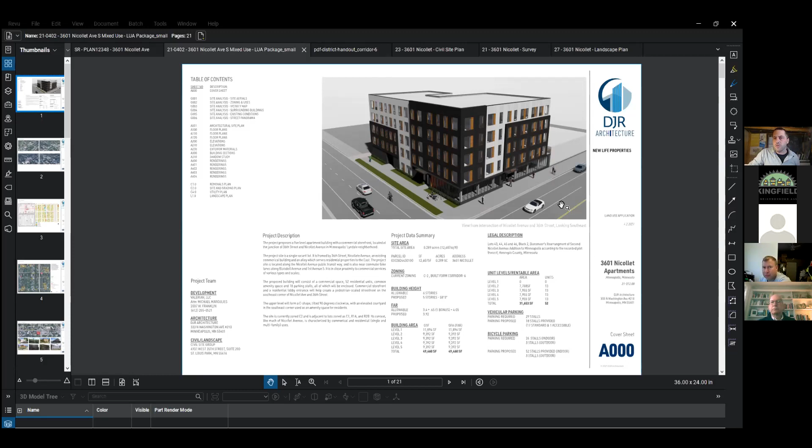Okay, it looks like we're getting some final folks in from the waiting room. I'm going to flip off sharing for one second, just for our recording. There we go. Michael, if you want to take it back over in one minute, that'd be fine. Sounds good.

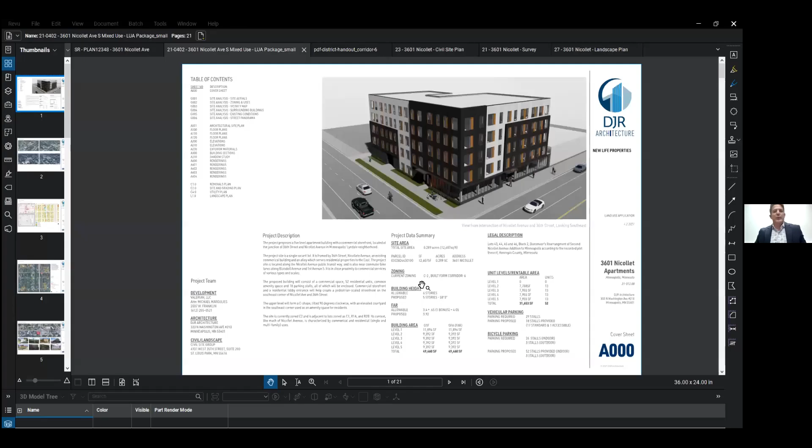Thanks everyone for tuning in tonight and letting us present this project to you. This is 3601 Nicollet Avenue, a 5-story, 52-unit building at the corner of Nicollet Avenue and 36th Street. I'm going to present exactly what we sent to the city of Minneapolis for the land use application. We'll walk through this one by one, and I'll give you a good overview of what the project looks like.

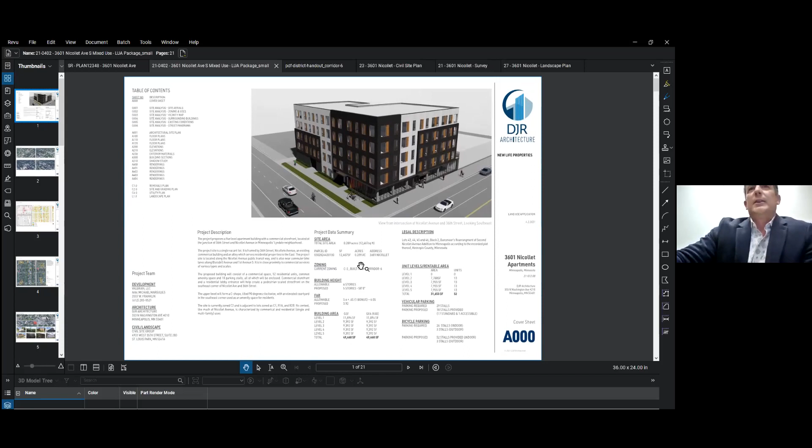The overall zoning of this project is C2 with an overlay, a built form overlay from the city of Minneapolis, where because of the zoning and the built form overlay, they want mass with the new 2040 plan. If we were going to use all of the 3 different bonuses on the built form overlay, we could actually go up to 6 stories and cover almost the entire site. We chose 5 stories and a lesser footprint because it made better units, and we were worried about the overall scale of the building. So that's how we arrived where we did.

At the corner of Nicollet and 36, we have some retail on the Nicollet side, and we have a residential access point along 36th coming from the north.

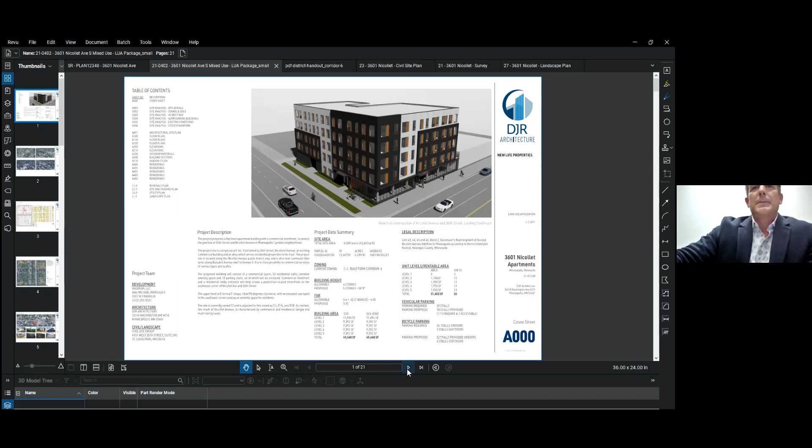Here's just some aerials of the site. I'm sure you're all well aware of where this is.

And of course, the zoning - C2. I don't believe we're in the zoning overlay district, but the built form overlay that the Minneapolis Planning Commission has just come out with, within this past year, is also contributing to the regulations here.

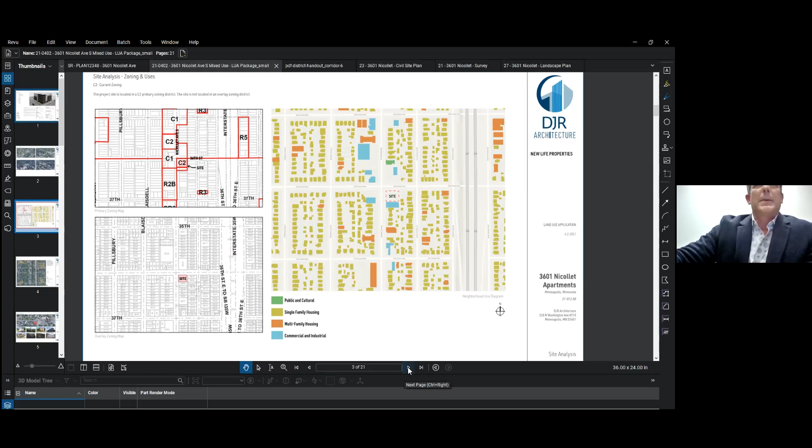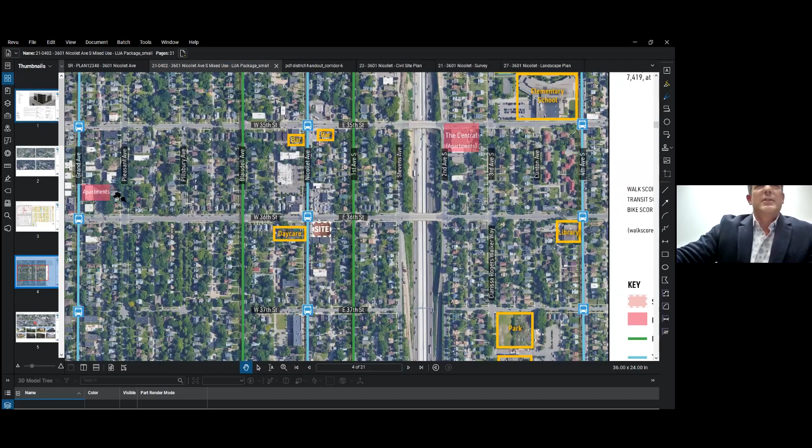Here's a diagram showing the site here, this little area, and then the different elements around it. We've got a daycare across the street, and some restaurants and bars and different apartment buildings, schools, parks - just a wide overview of the overall site.

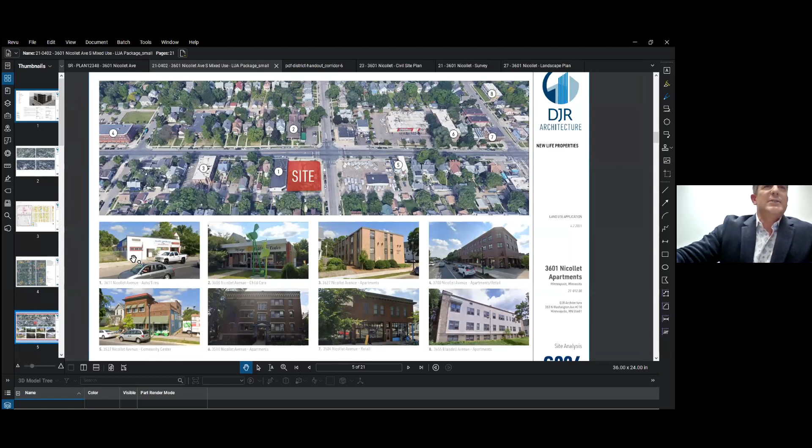Then a little bit closer view of the surrounding buildings of the site. Across the street, we've got the child care center. Directly adjacent, we have the auto service center that this will share the property line with on the south side. Various apartments, and a newer apartment building a little bit to the south on Nicollet.

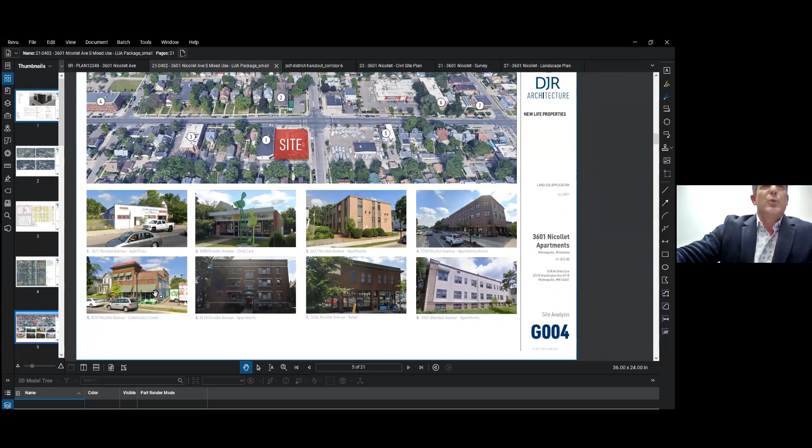We've got a community center just to the north of the U-Haul center, and then different apartments and so on.

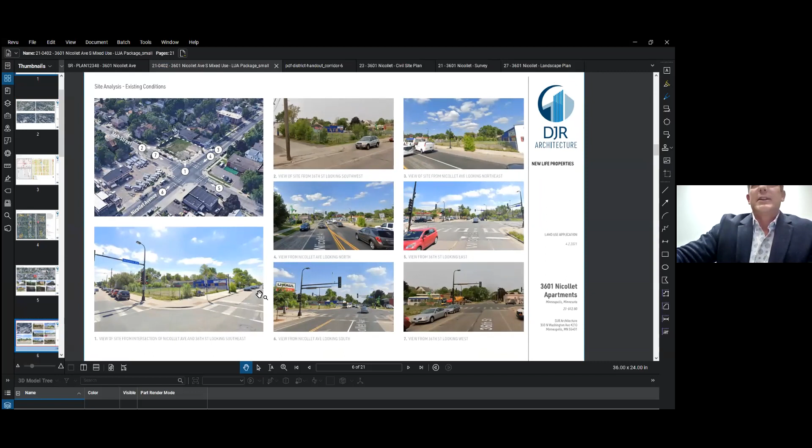These are just views from different parts of the site looking back towards the site. Again, I'm sure you guys are well aware of this - it's a very prominent corner on 36th and Nicollet, and these are different views to orient you, as well as some street panoramas. I'll go through this relatively quickly.

So the site plan - we were allowed, with the way it's zoned, a 0 lot setback on all 4 sides with the C2 zoning. Had there been a residential property to the south, it would have been a 5-foot setback, but because it's commercial use, we're allowed to go right to the property line. So what we're doing is going about a foot from the property line for constructability reasons, but we are taking up the majority of the site footprint at level 1.

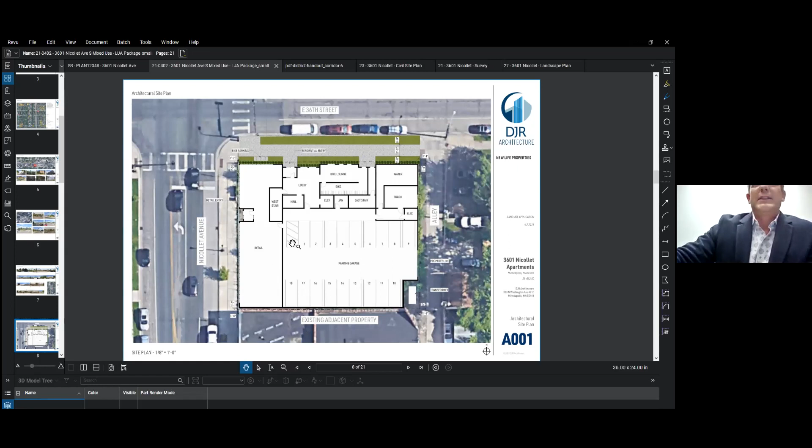As I said before, we've got retail on the Nicollet side. This retail is about 25, 30 feet deep. The idea with this retail is that we know retail is changing along Nicollet, and we may need to subdivide this down. So we're showing a vestibule in this location right now, because we really didn't want to interrupt the corner view, thinking this would be a nice spot for a tenant. But we're not limited to only this access point - we can put multiple access points around here if what people want or what possible tenants want are smaller spaces to lease.

So right along Nicollet, we're basically at a 0 setback line. Along the north side, we're also at a 0 lot setback, with about a foot off the lot line for constructability reasons. We're recessing the vestibules on both the retail and lobby space to get the door swing clearance, since we can't swing doors over the property line in Minneapolis.

There's also a niche or recess for the bike lounge and bike storage area. We've got utility areas for water and trash. Trash will be enclosed, kept in this area until it's picked up several times a week off the alley, but this will be a totally contained operation as far as trash goes.

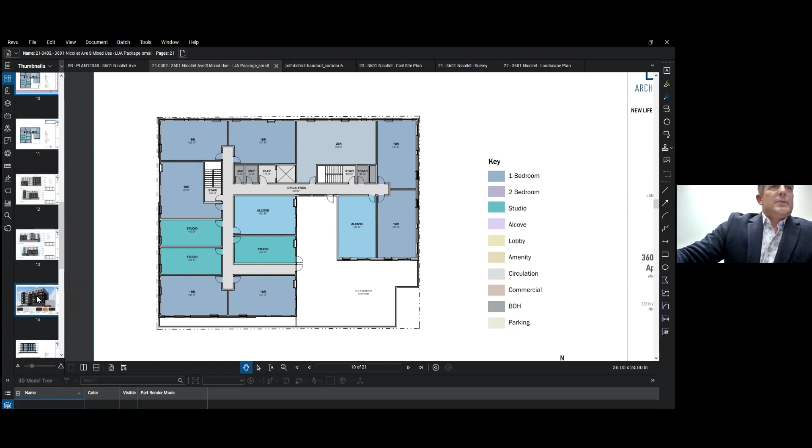So moving out to the exterior of the building, we've got this corner site and we wanted to position the building with equal weight on Nicollet and 36th. So we positioned the building so it's really hugging that corner.

It's a simple palette of materials that we're using, but I think there's a sophistication in the design, and we're breaking it down into a smaller scale that fits this small site. It's not a real big site, it's not a real big building, and I think there's enough complexity here to make it interesting.

But I think when you've got a small building like this, you run the risk of making it too complex and too busy just because it's not that big of a building. I think we only have about 120 feet across the front of this building, which is a relatively small building in Minneapolis.

As far as the material palette, on level 1 we're going to have a lot of storefront and glass at the retail space. And then there's going to be this Manganese Ironspot brick with a dark colored grout to match the brick, which will really make it seem monolithic and clean.

We're going to have a dark aluminum canopy that runs at the vestibules, and then a little eyebrow that runs the rest of the way. We've also got exposed fastener standing seam metal panel, that's the black. This is something I didn't mention last time we talked.

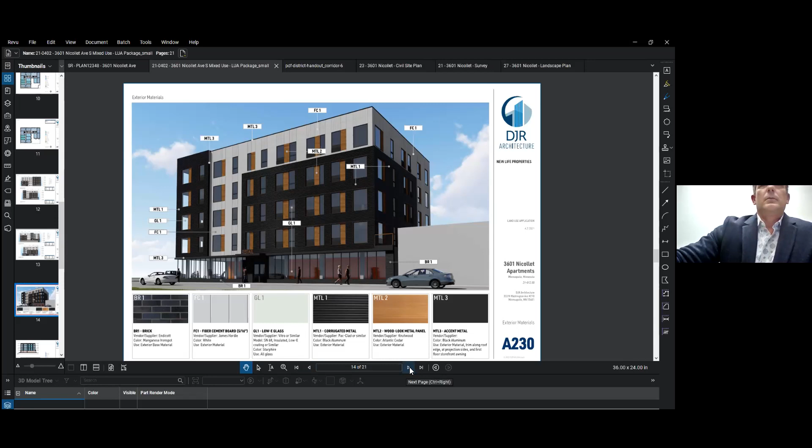So we've got some sections of the building. The first story is parking, retail, lobby space, and function. We do not have a subterranean level for a couple of reasons. One, typically you'd put parking down there, but it's practically not big enough to get a car down at the ramping requirements necessary. The other thing is, because there was a gas station there, we're almost certain there's probably some contamination in the soil, so it's best left where it is.

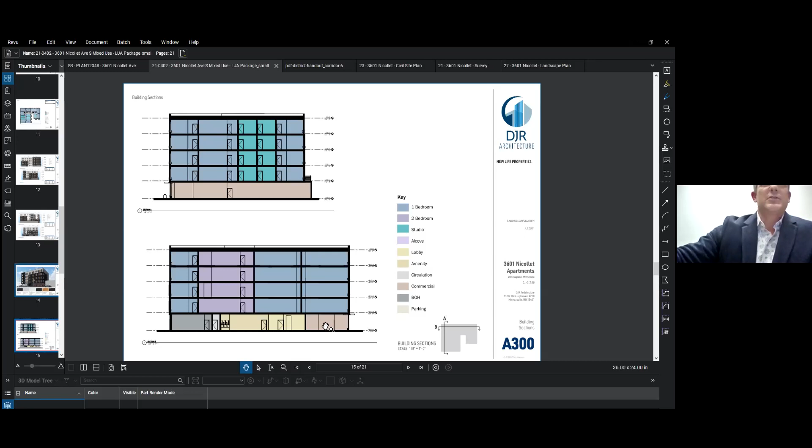We've got some shadow studies showing the impact of shadows of the building. The greatest shadow effect is going to be to the north where the U-Haul Center is, and there's the extra wide street with the extra wide right of way at 36. So some shadows will affect a few of the neighbors, but I think it's relatively minor.

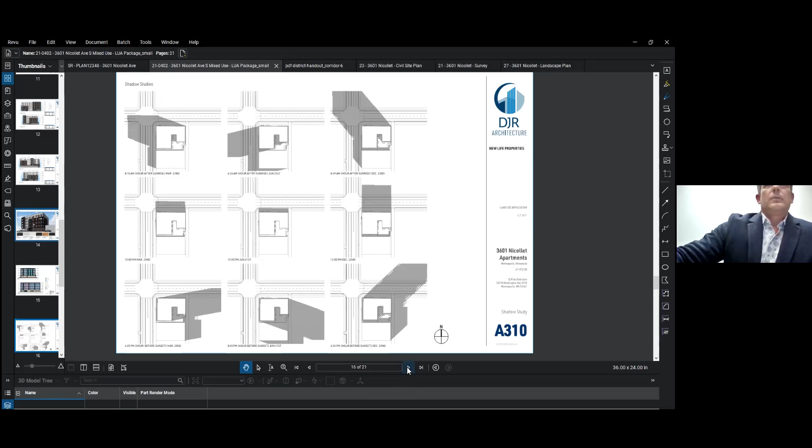And then some more views around the building. This is a view from the north looking at the 36th Street facade, again showing the entrance to the residential. And this is more of the Nicollet facade with the entrance to the retail.

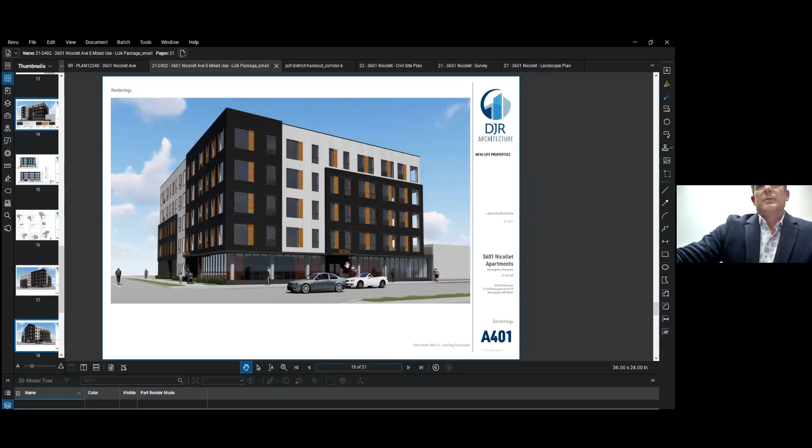So one thing we need to talk about is the variance we're going for the parking. The building overall is kind of as-of-right. We're using one bonus with the built form overlay to get us to the FAR, the floor area ratio. If we wanted to, we could have gone up to 3 bonuses and made this building much more dense, but with units and the natural daylight coming in from the southeast, we elected to go with the 1 bonus.

But the parking, just because of the floor plate size and other considerations, we were limited to 18 stalls. Right now, this building would be required to have half of the units for parking stalls within the building, which would have been 26 plus 3 for commercial, so we're really required to have 29. Our variance is to go for 18 parking stalls. We should mention the city of Minneapolis is in the process of limiting their parking requirement overall throughout all projects, and the Planning Commission has already approved something—I don't know exactly what the requirement is, but I think it might be even zero parking for a building like this.

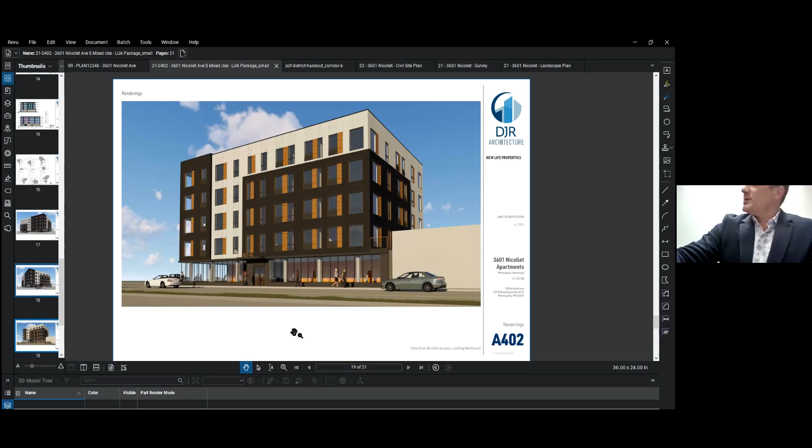So I think that kind of concludes my presentation part. I don't know, Dean, do you want to add anything, or should we start fielding questions?

No, I think you did an excellent job, far better than myself. So Michael, thank you for walking through the building. And just to clarify one comment, when someone said you look like you filled the site, we may have filled the site in its area, but we could have gone a story taller and still stayed within the zoning requirements. So we opted to scale it back and go to a 5-story versus 6-story building. I just want to clarify that comment. Outside of that, we're good and we stand for questions. Thank you.

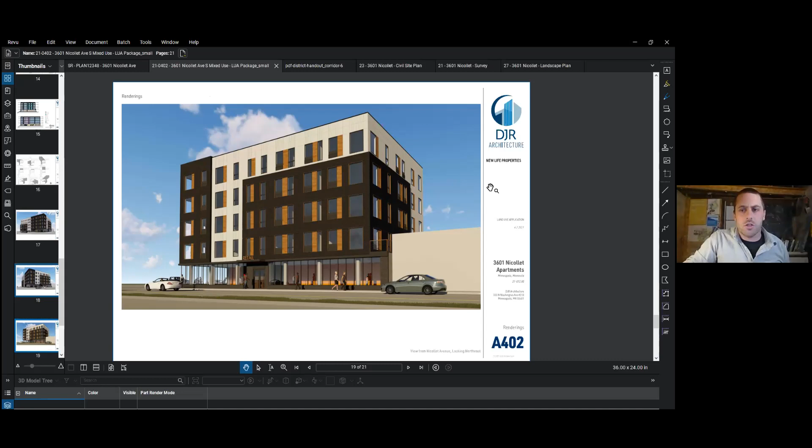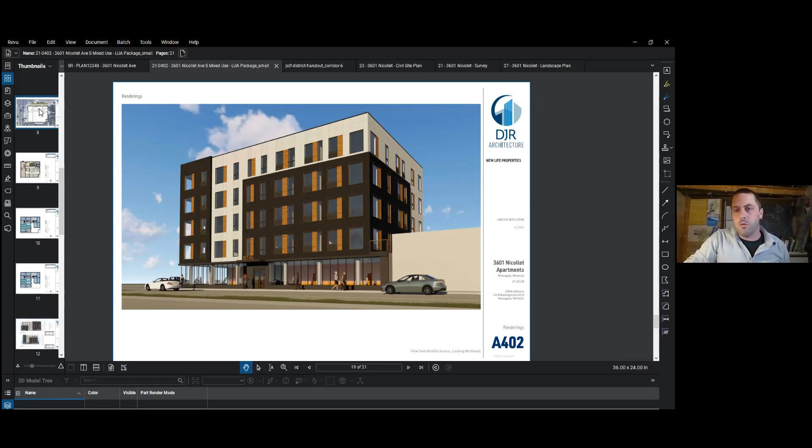So I guess the first question I had, just going off of Dean's comment about filling the site, there was a question about filling the site and how you're planning on managing snow removal, and also thinking about incorporating green space, plantings—especially green space and plantings for tenants that are in the building itself. So it's a 2-part question, mostly about snow removal and then also green space.

Michael, you want me to take or you want to go? Yeah, I think I can describe the north side of the site.

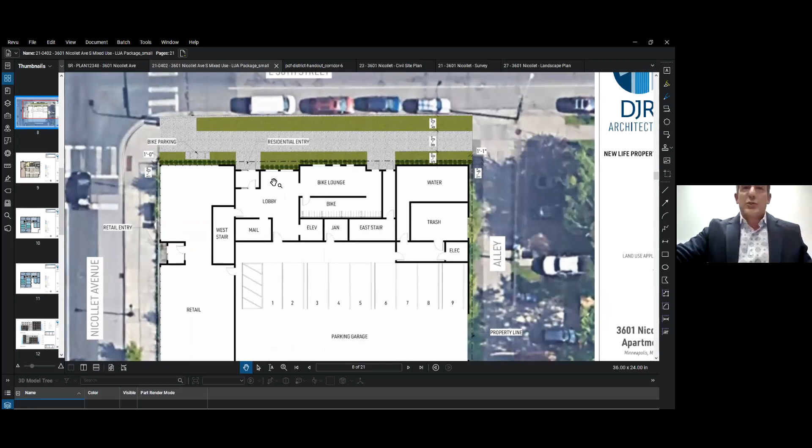There's a 5-foot right of way outside the property line to the north until we hit the sidewalk. That area is meant to be planted and will be adequate for a bit more vegetation, as well as a place where snow could be put in the winter from that part of the sidewalk.

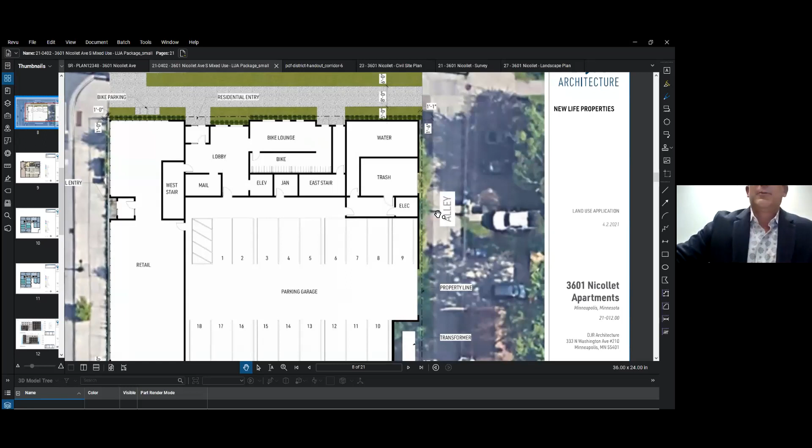As far as snow removal from the alley, just because we're close to the property line doesn't mean there's no margin left over from the alley to where the building actually begins, so snow will be piled there. It is a tight site and we're getting close to the property line.

There's enough room there to navigate the snow. The idea is that all the snow basically stays on the building's property on that basis, so we have room for some.

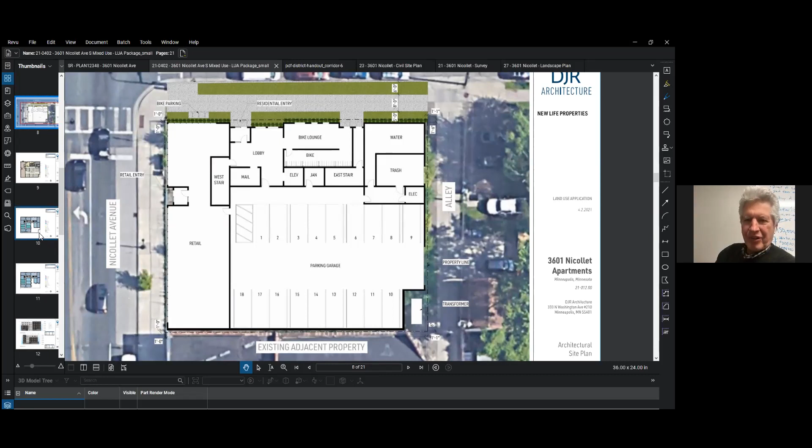There was a second question about planting. We have the green strip along the side, and also the community deck, which we may make into individual raised beds to give residents an opportunity to plant. So there are two options: one, the public right of way on the main floor, and two, the community deck on the 2nd floor of the building, that we're thinking of incorporating for the planting opportunity for residents.

Great. Could you talk a little bit about that upper deck, what your thoughts are for what's going to be up there, who's going to have access to it, and whether that's going to be a built-out feature of the project from the beginning?

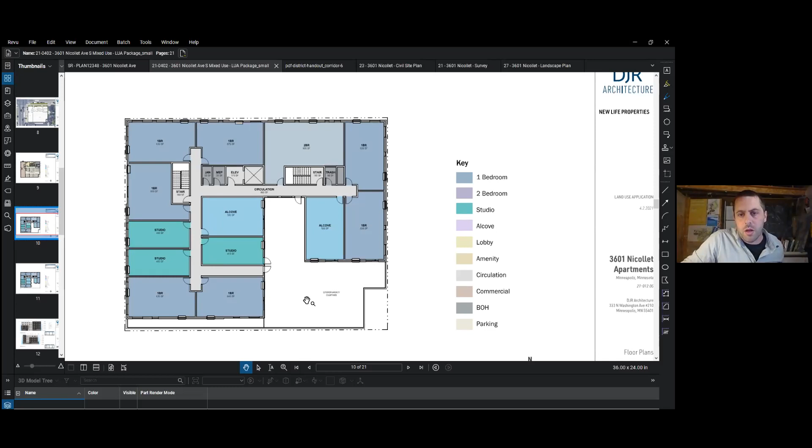The answer is yes, it will be a built out feature from the beginning. It won't be designed to be an active use because there are units right on it, so it won't have pickleball or anything like that. It's meant to be for gardening, as I mentioned, and outdoor hanging out.

There'll be a trellis, there'll be elements, there may be a smoke pit built into it. So it'll be a green space, think more of an outdoor living room design, more of a passive use as opposed to an active use will be the basis of this.

We intentionally left one unit out, as you'd see, to notch it in so there'd be light going to the hallway, so the hallways were bright and kept perceived shorter. And on all those floors, the windows from the common hallway overlook the common community space, which adds a little more interest to it.

So that's its basic function, but it will be developed out 100% when the building's open. It's not going to just be a dead roof as part of it.

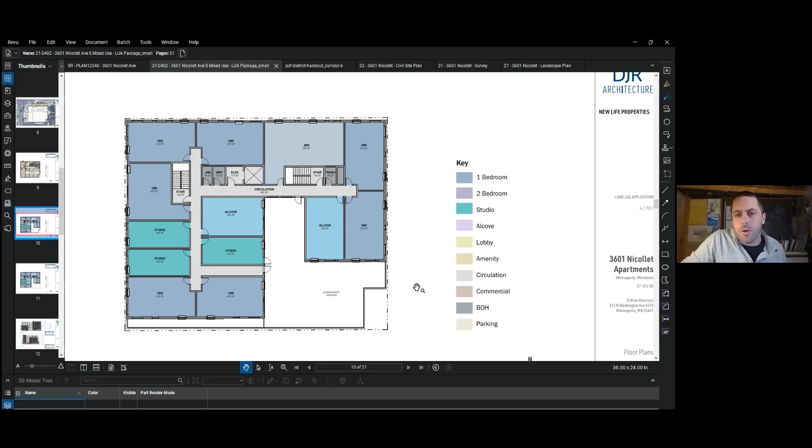Okay, great, thanks. Could you talk a little bit about affordability? There was a specific question noting that 8% of the units were going to be affordable. Can you talk about what that equates to in actual units in the building, and what that equates to in AMI and rents?

Sure, let me take that. At the moment, the city of Minneapolis is requiring an inclusionary housing policy of 8% of the units. With 32 units, that equals 2.6, which we will round up to three units.

It is a possibility, and I don't want to make too much of a commitment on behalf of the owner, but the owner has adopted programs to devote certain portions of his unit numbers to affordable units at 60% AMI, in return for the real estate tax benefits that go along with that. So that's a possibility here.

We think that this property will serve the needs of workforce housing. Although the rates haven't been fully established yet, they're probably going to be pretty near the naturally occurring affordable housing prices. So that's sort of how the housing array works.

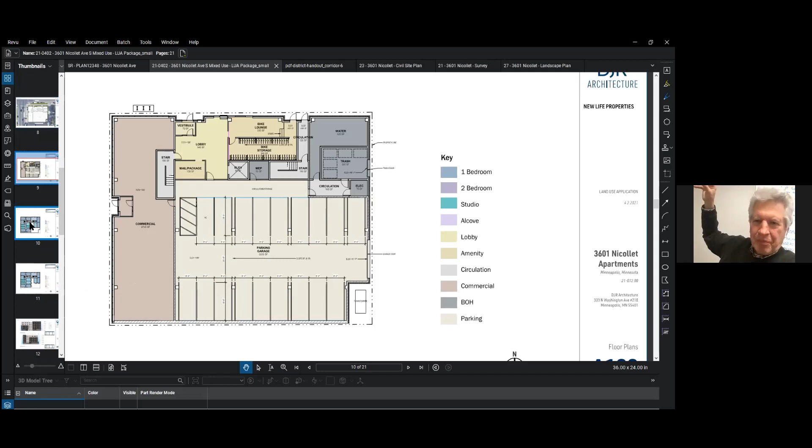Okay, so micro retail can work. We probably have entry for 2 spaces when we're set up on that, so the building can accommodate it. If we get a restaurant, we'd have to coordinate the shaft, and we're still early enough to see who shows up and sets that basis. When you've got a shaft, Minneapolis code requires an exhaust shaft to the roof for anything that has heavy cooking. If it's more of a bakery style, like a coffee shop, that's not required. We're still at the point where we have flexibility on that, and we just have to see which tenants come forward. So yes to micro tenants, no problem with a coffee shop. If we get a true restaurant, we'd have to accommodate the shaft, and we'll see when we get there if that type of tenant comes forward to see how we can incorporate that.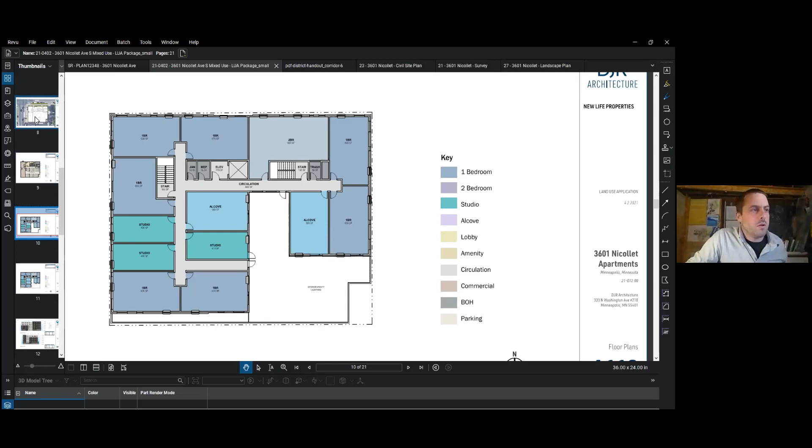Another question was the setback to the south, to the auto repair place—how close are the buildings together? You could go zero, literally, but we left a little bit of a gap to accommodate for the auto repair's footings, because these older buildings' footings tended to be across property lines and so forth. So we left a slight gap, about a foot, to accommodate that building, so we didn't put it into jeopardy in terms of construction. We're not doing a basement because, as Michael described, we are not allowed to, but we gave a little smidgen of breathing room just to protect that building structurally.

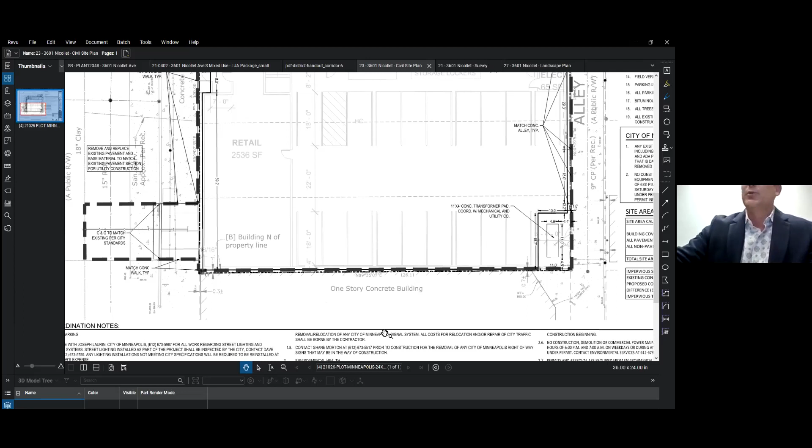And that gap, it's going to be in the range of a foot to 16 inches. It'll be enclosed—we'll put sheet metal flashing or something so nobody can get back there and get in trouble, like a kid or something. So it'll be closed off, so it'll seem like it's totally one building to the next without any opportunity to go in between the two. Correct, Michael's right about that—he and I would get stuck in there. It won't be left as a void to the street, nor to the alley side.

There's a couple questions about all of your experience here, maybe specifically in Minneapolis, designing and managing properties. So a question about how many 5 to 7 story buildings DJR has designed in Minneapolis, and also what current properties are owned by New Life Properties and managed by them.

Dean, why don't you take the first part of that? Oh Dean, sorry, you got muted on accident, I think.

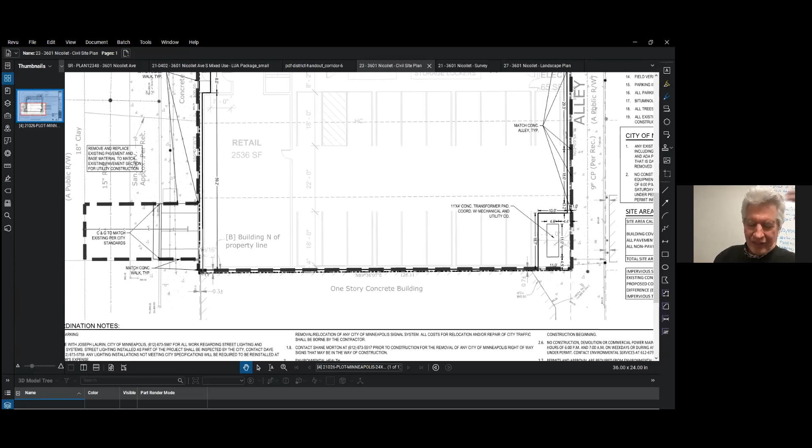Okay, thank you. So I'll answer the first half of the question. At this time, probably 40 in Minneapolis, if not more, in all parts of the city, for a variety of different projects - Northeast, all through South Minneapolis, north side of the city, and a whole series around the university area. So I'm going to say 40 off the top of my head that are built and occupied. So yeah, we've had a pretty deep, extensive background in these type of buildings, everything from very affordable to very luxury, the full range of project types.

Michael, you'll do the other half. I think, let me introduce Dan. Dan Carlson to describe a little bit about the other properties he owns and operates. Sure, we own 23 other buildings with a total of 164 units in South Minneapolis, and then we also have 40 units in St. Cloud. We own and self-manage all of those ourselves.

And kind of going off that question, would you plan on managing this building? And then there was also a question about whether there will be someone on site, like a manager on site. Yes, we will manage the building ourselves. We're trying to incorporate something to have somebody on site with the retail, like we were thinking about doing some kind of retail ourselves and having some kind of office there.

There's been a few questions, and I know you've talked a little bit about the parking and the parking variance. Questions about parking, specifically about impacts that a decreased number of parking spots in the building would have on the rest of the neighborhood. Can you talk about and reiterate your approach around parking, and also the guidance or direction that you're following from the city of Minneapolis in regards to parking?

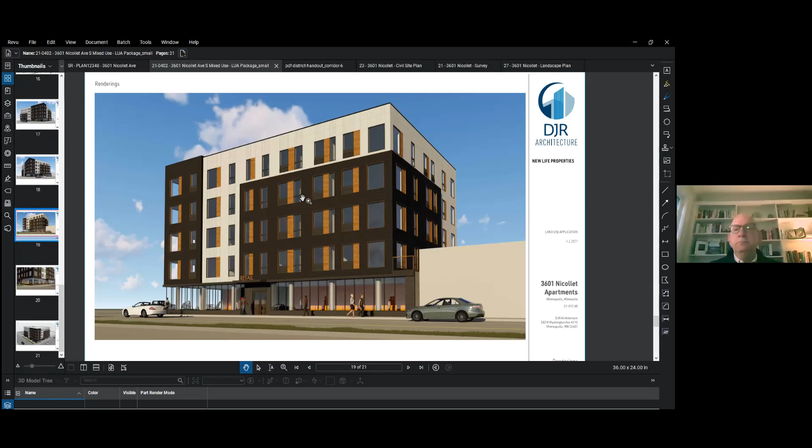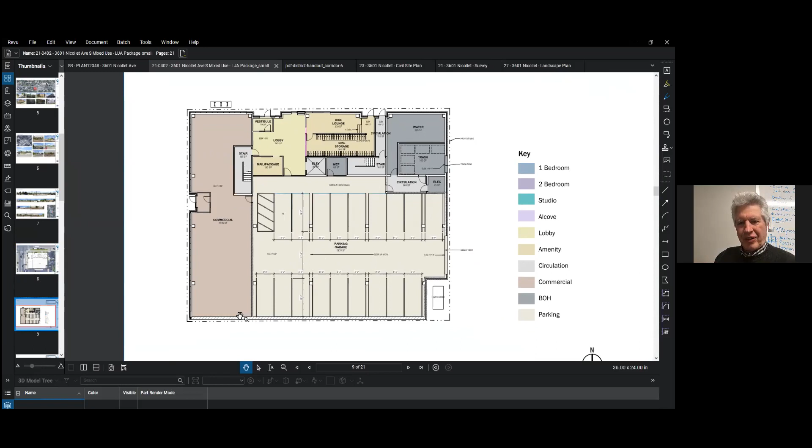The direction of the city of Minneapolis is less is more. Just to be straight up, there were two things Minneapolis planners really impressed upon us. One, enclose it - no open lots. Two, minimize it. That's really what our guidance has been from that aspect. We set this up to try to maximize the amount of parking you could get on the site, because obviously for a building we want some available parking for our tenants. That's how we chose to fill the footprint, to maximize the parking. We also shallowed up the retail to maximize the parking. Normal retail can go up to 60 feet deep, but then we would have wiped out our parking. So we made sure we had active uses wrapped around the perimeter of the building - the lobby, the bike shop, the retail - and then put as much parking as could work inside that core of the building to maximize that portion of it.

Yeah, and I would envision that there's going to be a large number of the residents here that don't have a car, and that's why we're making it so bike centric. People are going to have their bike, it's right on a transit line, and I think there's going to be a good number of people here that don't own a car that live here.

Kind of going off that a little bit, there were two questions. One, has there been any consideration to what happens if tenant parking isn't used at capacity? Could it be paid parking for retail? And then, going on your point about transit, how are you thinking about incorporating access to transit into the building, specifically like a shelter in front of the space on Nicollet - would that be a part of your project? So in terms of the parking, if parking is underutilized, obviously we'd utilize it to support the retail. That's just a definite yes.

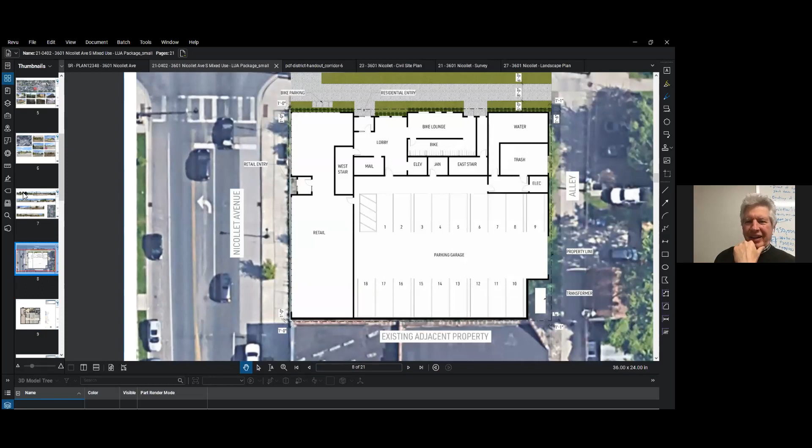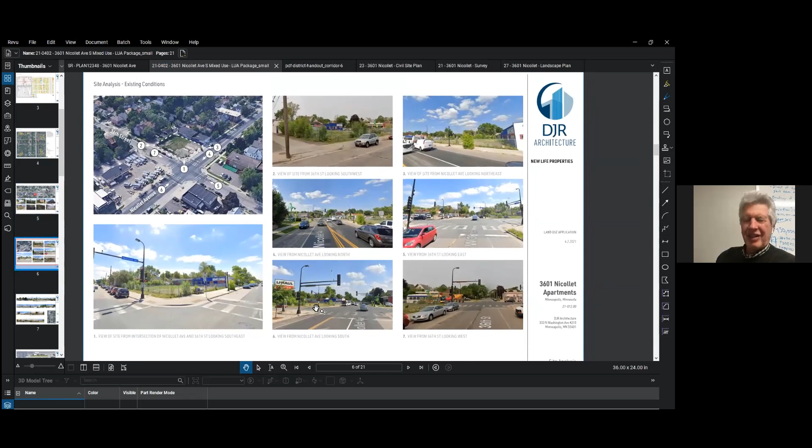Incorporating bus shelters is tricky depending on how our retail sets up, because if we incorporate a bike or bus shelter, we may lose some retail space. So it goes back to how the retail sets up, and on that basis we tend to favor retail for an active street as opposed to carving a bus stop into the building.

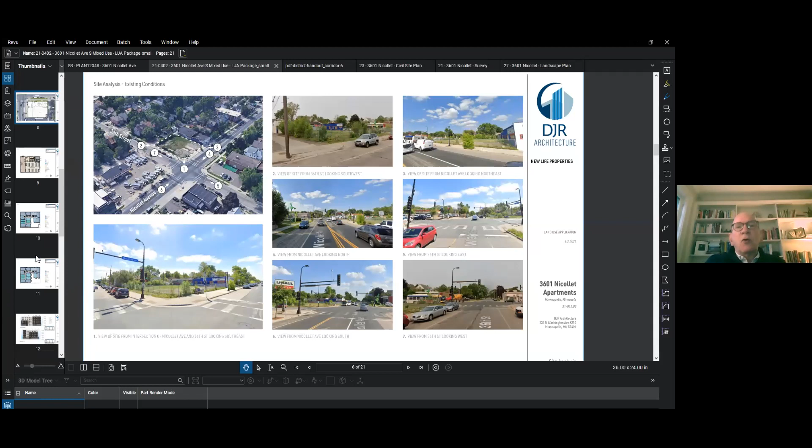If I can add to that, as most people on this call know, bus stops and bus shelters are the purview of the Metropolitan Transit Authority, and they control that decision, not us. The things we can control are things that help people with transit. One feature in our lobby will be an electronic kiosk showing the bus lines, transit lines, and approximate wait times for which lines are coming in - an information center to help people use transit more effectively and efficiently. So residents can see when the bus is coming instead of waiting outside, then scoot out to catch it.

Okay, thank you, switching gears a little bit. One question is about stormwater and how it's planned to be managed on the site. This site is below a half acre, so there aren't any additional stormwater management requirements for a site this size. I think the city of Minneapolis is looking at modifying that, but I don't think that regulation would fall on this project.

Just curious, where does the water go that hits the roof of this building? It goes into the city storm system - correct, it's a direct feed into the stormwater system. Okay, thank you.

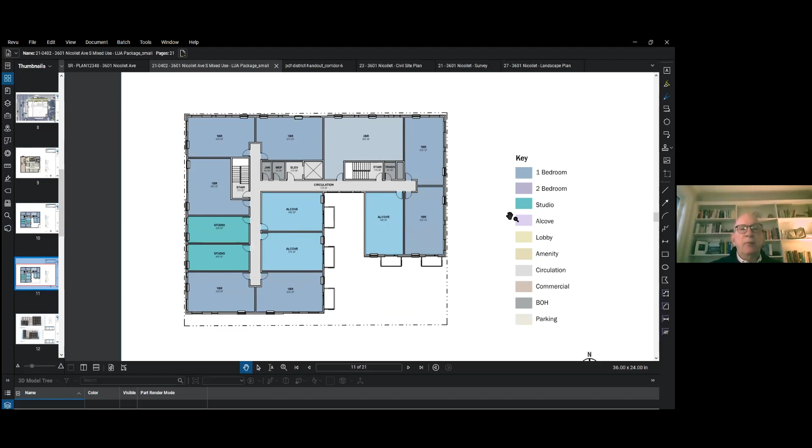Do you know what the mix of affordable units will be size-wise? What units are you targeting for affordability - studio, alcove, one bedroom? That issue is probably not decided yet. I can tell you this owner has a general desire to mix them, so I'd envision you'd see a representation of all unit types within the affordable units. The city doesn't specify anything, so you're left to devise your own program. We think it's a little more egalitarian to have this spread, but we'll see how that works as we get closer to opening.

Okay, thank you. Question about spots for charging electronic or electric vehicles - that would be a possibility in our garage. Do you have that planned currently in the proposal?

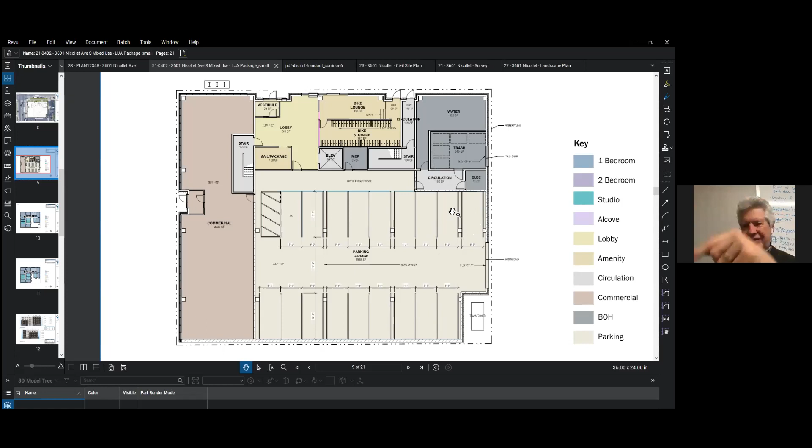There's nothing set, it's just based on... I think I'd want Dan to comment on this one - I think it's a great idea, but it's not really my call, it's Dan's call. I would love to see it on the northeast corner of the parking lot, where the electrical room is right there - it'd be so easy to make those 3 spots. Looking further down, in the southeast corner... actually, those 3 spaces in the northeast, since our transformers are down there. But yeah, we would consider that.

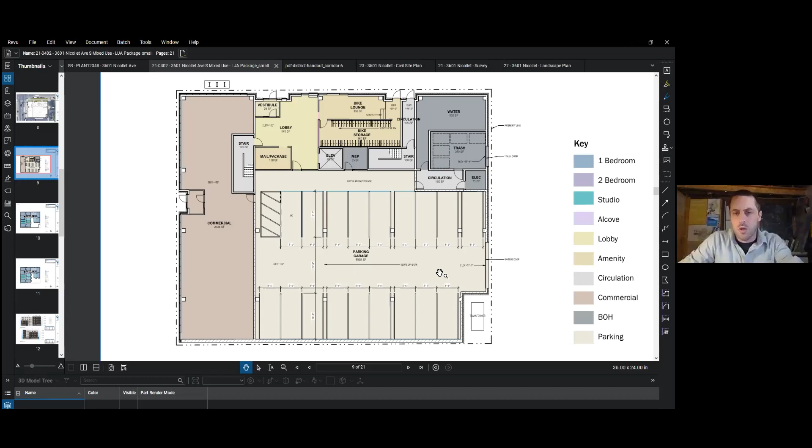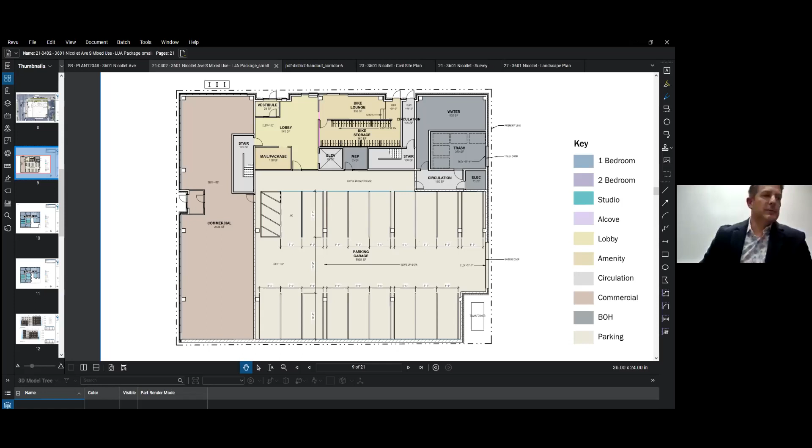Will the units be accessible to people who use wheelchairs, and can you reiterate that this building will have an elevator? Yes, definitely. A lot of these requirements are just building code and Minnesota accessibility code requirements - 2% of all units have to be handicap accessible, and we'll certainly comply with that. So there will be several units that meet those requirements, accessible and/or adaptable, and yes, it definitely has an elevator.

Okay, I think we're getting caught up on questions. Here's another one quickly, I think a comment/question: it would be nice to see some more differentiation along the ground floor - the continuous glass and columns sort of all blend together.

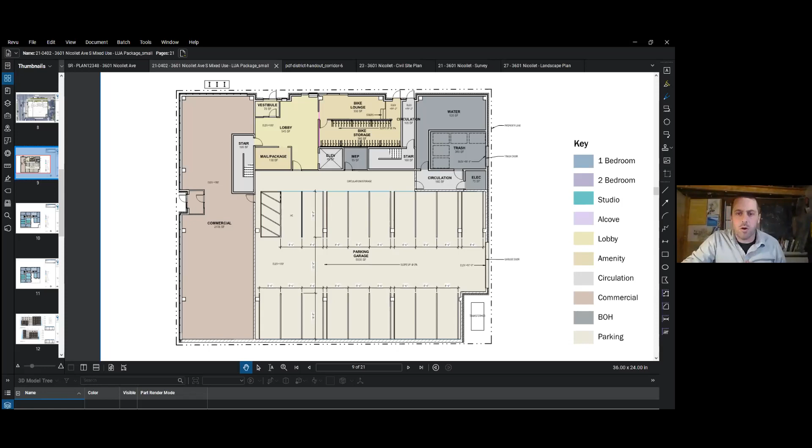Doesn't really do much if there's multiple tenants to tell those tenants apart. I guess I'll just open that up for comment for you.

I think it's good to realize that this is just a point in time in the design process. Although the building is going to be about this size and look fairly close to this, there's going to be development that happens. One area I'd like to develop more is that storefront. Just like was mentioned, if we do have 3 or 4 different tenants there, to each call out their own entry as a separate thing and break down the scale of the building even more. So I fully agree with that, and that just may happen.

Kind of a clarification on my earlier question around accessibility. The person who asked that question wants to reiterate, meaning maybe going above and beyond in terms of accessibility and thinking about wheelchairs getting into showers, using the counter in the kitchen, being able to pull up to a sink, also wider doorways. So maybe not just meeting basic ADA requirements, but also providing specific units that would accommodate and be specifically geared to someone in a wheelchair or other mobility device.

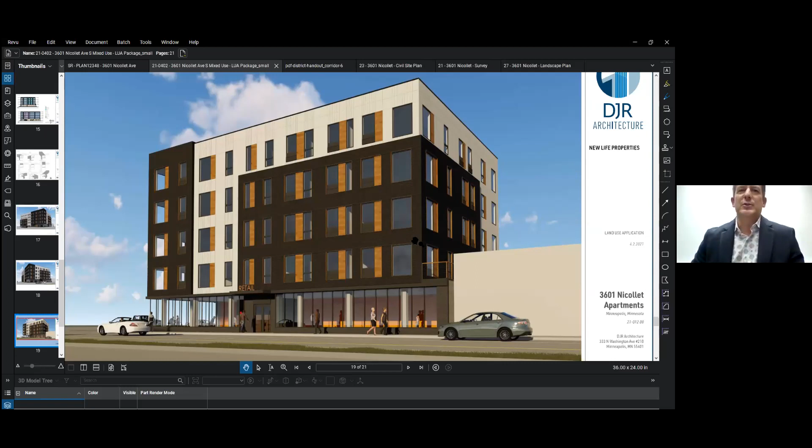Yeah, so the ADA meets that. There'll be a handful of units designed with different requirements, all meant for people in wheelchairs. So everything from the kitchen layout, the kitchen countertop size, the ability to maneuver into the appliances, into the washer dryer, and then there'll be one unit that specifically needs a very low profile curb to get into the shower. That's a building code requirement and Minnesota accessibility requirement, so absolutely.

Great, thank you for clarifying that. A question around schedule, both in terms of the process going through the city and the approval process at the city, and then also your construction schedule.

Sure, let me respond to that. The land use application has been filed. The Planning Commission will consider the matter next week. At the same time, there will be a PDR, preliminary design review process that continues, and that will be finished probably in the next 20 to 30 days. The hope is, if all these approvals are obtained, that we would have the construction drawings prepared and start construction early fall. It will be about a 12-month construction period, maybe a little less, with tenants taking occupancy late summer, early fall of 2022.

Okay, thank you. I'll tell everybody too that we try to keep residents and everyone informed of the steps in these processes as possible. So we will be sharing with everybody the information as it comes up, both in terms of opportunities to share your input and insights to the city and the team, and also as construction happens, we will check in with the team here and ask how's stuff going, what are we looking at, and then we'll share that back out with the community.

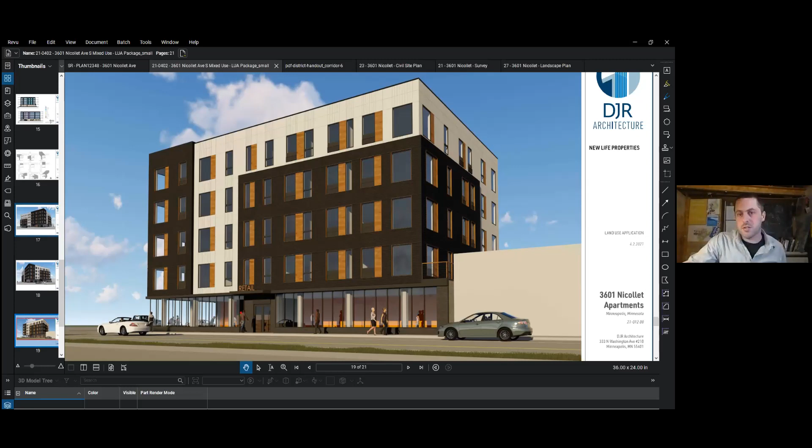Yes, so a project like this that's not in a transit corridor needs to have one parking stall per unit. This project is in a transit corridor, which means it gets a 50% reduction per the zoning code right now. So with the 52 units, we need 26, required by the zoning code. And then there's 3 additional for retail, so that's 29, and we're providing 18, and that's the variance.

However, if we would submit this project a month or 6 weeks later, with the assumption that City Council accepts what the Planning Commission has done with the parking regulation, this project may not be required to have any parking. So that hasn't happened yet, but it's a real possibility that's going to.

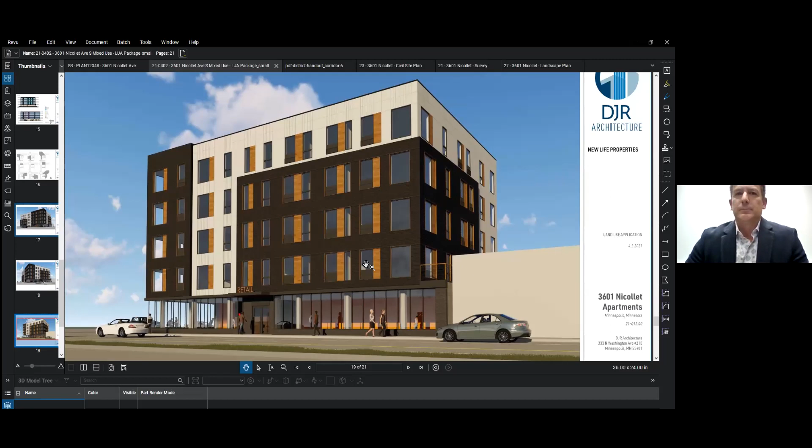Okay, in the last 8 minutes, apologize if I missed anybody's specific comment, please throw it back in the chat. I think I've gotten to most of them. There was a specific question around street trees, that I see there aren't any included in the project, and the person was most interested in the possibility of including street trees along the Nicollet side. If you could comment on that.

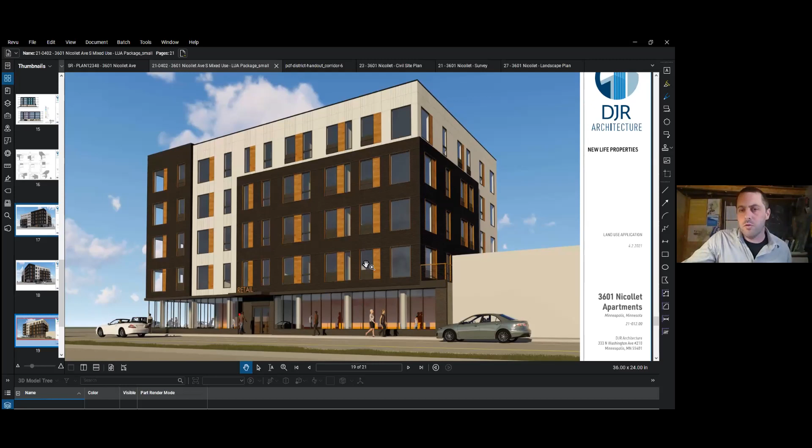That depends on the city arborist. Street trees fall within the city landscape plan and arborist's decision. So if they request it, if it's part of the city's plan, we'll incorporate them. For these commercial streets, they tend to look at the arborist to decide if they want street trees on these commercial corridors or not. So the answer is we don't know yet.

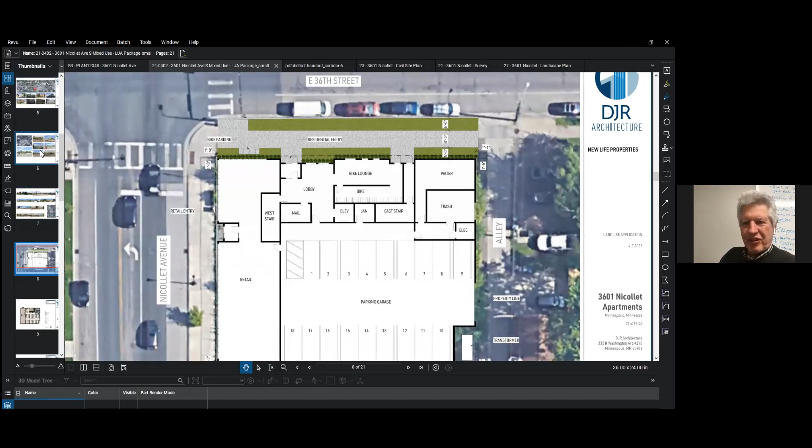And given this area that's had the solid sidewalk, we'll find out from the city how they're going to look at it, where the bus stop is and so forth. Along 36th, they may require it, and we'd be glad to put it in. Right now it's all solid concrete. There's one tree that looks like it's turned into a bush that may be a location where we could potentially replace it and put a real tree there. So that's probably where we could incorporate a street tree, because I think there's an opening there. But again, it's the city's call on that.

I just want to reiterate that this is a public right of way here, this 5 feet between where the fence is, the property line, and where the sidewalk is. So this 5 feet will be grass and plantings and a little bit of green space against the north edge of the building.

There was a question about maintenance of or support for trees and plantings. What is all of your responsibility in terms of maintaining the landscape, specifically trees or other plantings put in as part of the project?

Go ahead, Michael. Any trees that we ask permission to put in, or that the city requires us to put in, need to be maintained in their stated condition by the owner of the property. And we would maintain it because honestly, it provides quality of living, quality of housing, so it speaks for itself. We do want to maintain the landscape and encourage and enhance it because it makes a more pleasant environment to live in. So it's a good question, but I'll say the answer is obvious — yes, that's a must to do.

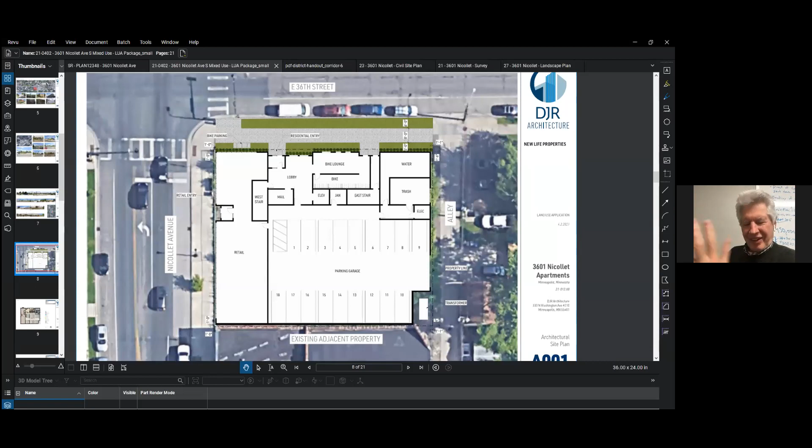I guess I'll turn it back over to you guys for any last comments, and then we'll sign off. Just to say thank you for all these good questions and for taking the time out of your evening to do this. We really appreciate it, and we'll try to be as responsive to your concerns as we can. We're excited for the project, and the fact that we can put active use on a vacant lot is always a good thing. So thank you for taking the time to see our presentation and hear our project. Appreciate it.